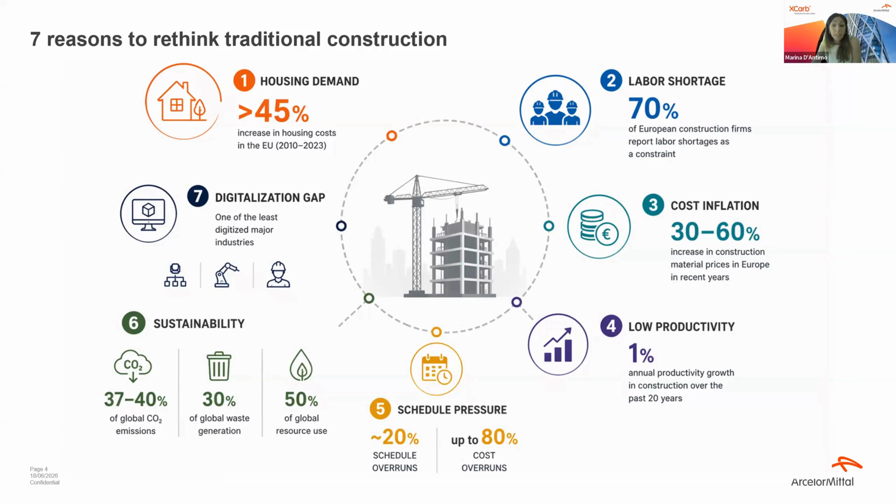And recently we have added on top of all of this that construction is also responsible for the highest share of CO2 emissions, resource use, and waste generation. The European Commission is pushing with regulation to make construction more sustainable, and in the coming years this will become quite a burden. So this is not only one problem, this is a set of problems putting the whole system under pressure. This is why we need to rethink the way we build, to solve, or at least try to solve, some of these problems.

So what might change when we go offsite? When we move our construction offsite, we shift from construction as a kind of fragmented sequence of problems to a construction which is more controlled, repeatable, and industrialized. That changes everything, because we can respond to the housing crisis, accelerating housing supply and affordable housing. We can reduce the cost, reduce the delay, shorten our time on site. We can also address the labor shortage, optimize safety, and stabilize the workforce.

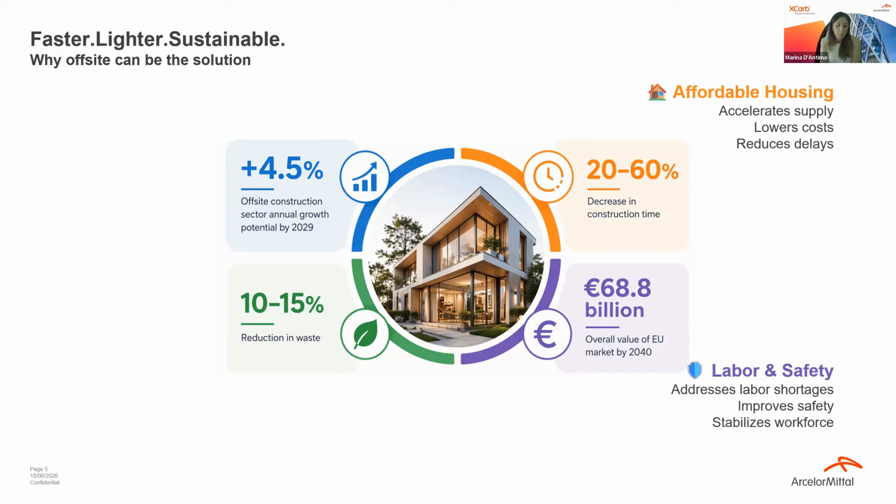But this is not enough. One of the major changes is that we also take into consideration the optimization of material use, reducing waste, and supporting the concept of circularity that you might have heard coming back quite often. But I think there is also another important pillar, maybe the most important one, because it gives the foundation for the digitalization process. Digitalization is already embedded in the solution and standardized. The quality is controlled, traced, and it can be upscaled.

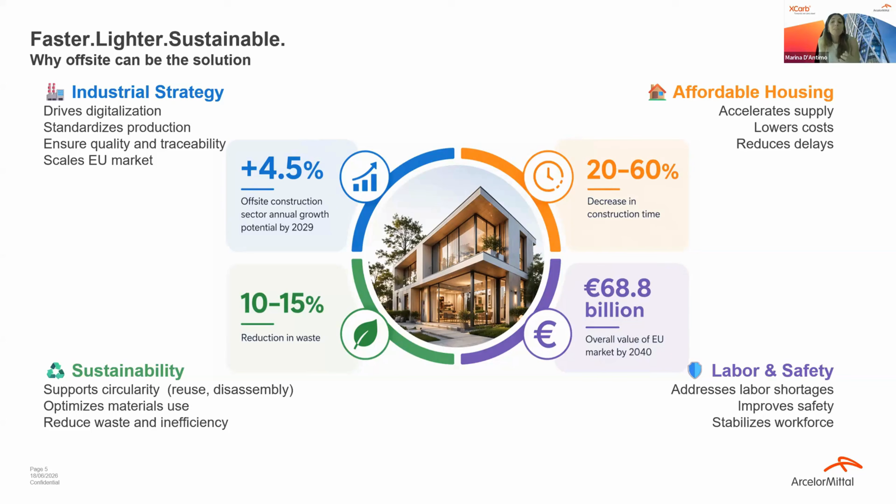If we want a better sector outcome, we need a better construction model. And this is, for me, why offsite is not just faster and lighter, and we will see in the next presentation all the good examples, it is a smarter way to rethink the way we build.

Offsite alone might not be enough, because once we have an industrialized method, the next question is: what is the right material for industrialized construction? This is where material choice can really play a role. Different materials will have different roles in the construction industry, but when our ambition is scalability, precision, consistency, and industrial repeatability, and we add the possibility to disassemble, recycle, or adapt our solution at the end, steel still brings some very powerful advantages compared to other materials, like timber. This is why, for me, steel is at the heart of this revolution.

Everything, we could say, starts with a simple steel coil, because then we need to process it to make light steel, to cold roll the sections, use the cold-rolled sections, and then we have offsite module assembly. We will go into detail on that. And then we have on-site assembly. So we need a material that works with manufacturing logic, not against this process of simplification and standardization. And for this, I think steel responds exactly to the needs of offsite construction.

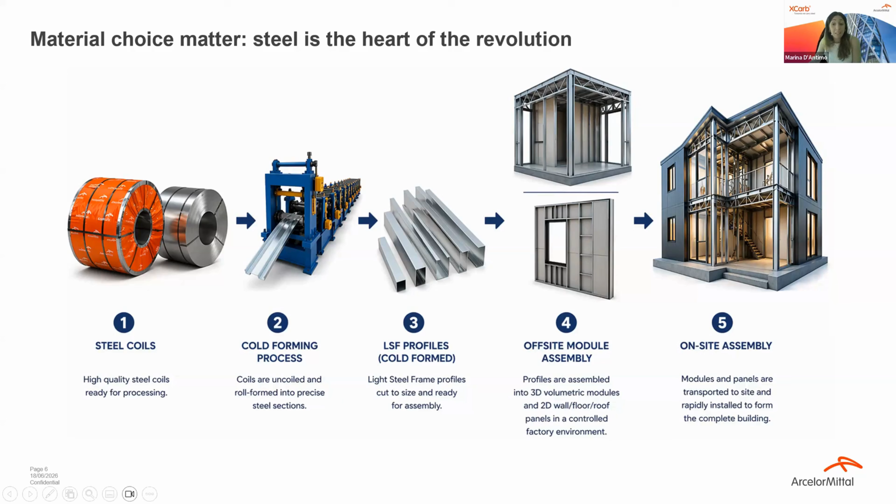Once we have chosen the material, the next question is which grade? Because innovation in construction is also about the intelligent choice of material, and innovation and research are pushing the limits of steel even further. We might be very used to designing with standard steel, for example S350GD, but today we have many more possibilities to make better use of material, keeping the same performance, or pushing for better performance while reducing material use. Using less material is already in the logic of a more sustainable solution.

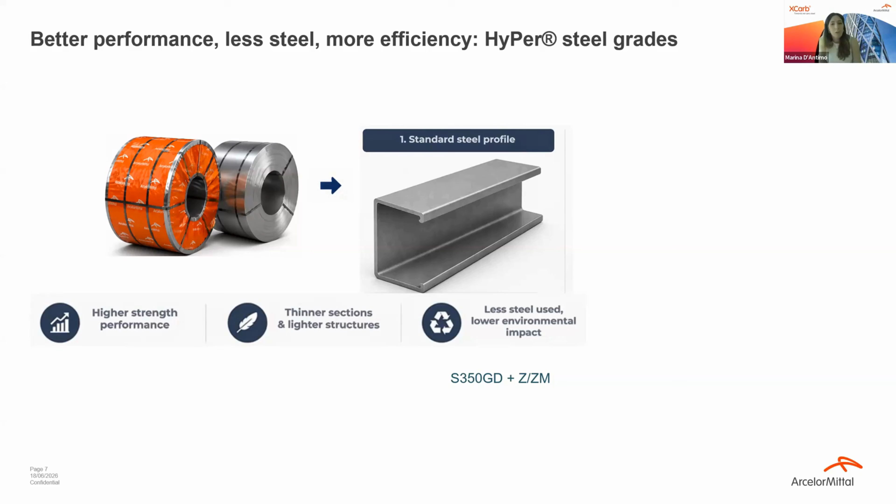For example, we could go higher in steel grade when and where it makes sense, of course. With high-strength steel grades, the idea is quite simple. You have higher strength, you can enable thinner sections when and where needed, using less material, so more efficient, more sustainable. In the logic of an offsite building, where every millimeter, every kilogram of steel, every process has an impact, this matters. It's not only about the metallurgy of steel, but also about the efficiency of the system. Less material, lighter structure, smarter design.

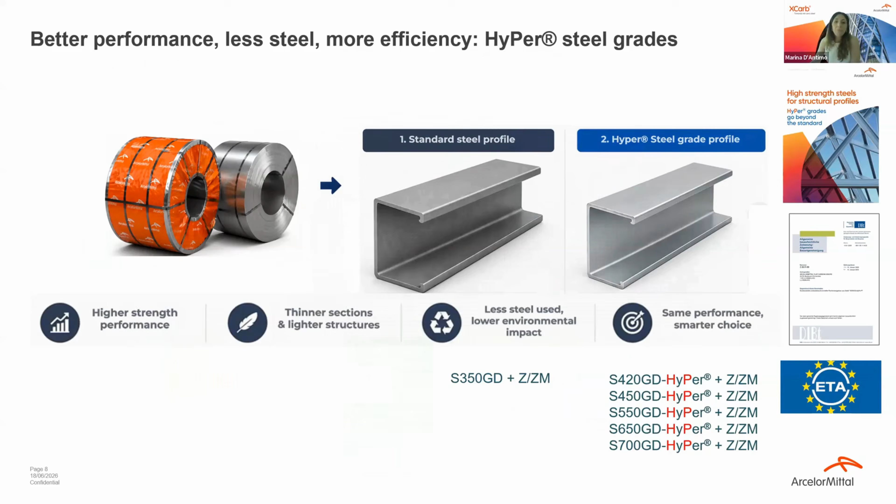But performance, in my opinion, is not only about strength, especially in offsite construction. There is often a point which is, I think, neglected when we choose a material, and that is the durability of a solution, especially when we are asked to extend the lifetime of a structure. If we want offsite structures to be adopted at scale, they must not only be fast to build and light, they also need to be durable.

And the message is quite clear. We need to combine the efficiency of the material with very high performance, for example, coating solutions that can enhance the behavior in the long term. So we will have less maintenance, less need to replace elements of the structure. And that's where efficient coating solutions play a role: they can give better protection, a better and long-lasting solution.

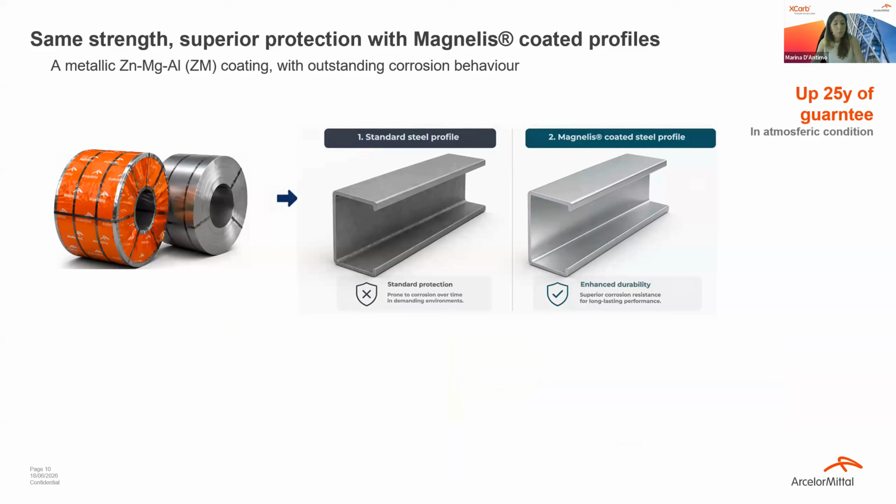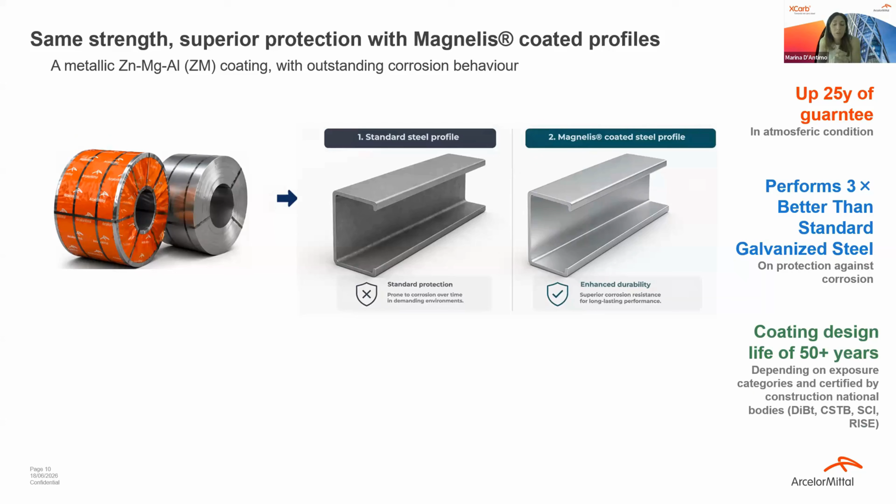And what that practically means is that our project can have a guarantee, so it can be guaranteed up to a certain year compared to the exposure level. It can perform much better than a standard solution, which will imply less maintenance, less need for substitution of elements and so on. And it can also have an extended lifetime, which is the final goal. And of course, this will play a role when the decision is on sustainability.

Now we come to the third pillar, the last one. So when it comes to material choice, we have chosen a material which is light, durable, but this is not enough anymore, because we also want a material that is lower impact. And this is why low carbon steel, low CO2 emission steel solutions, matter so much.

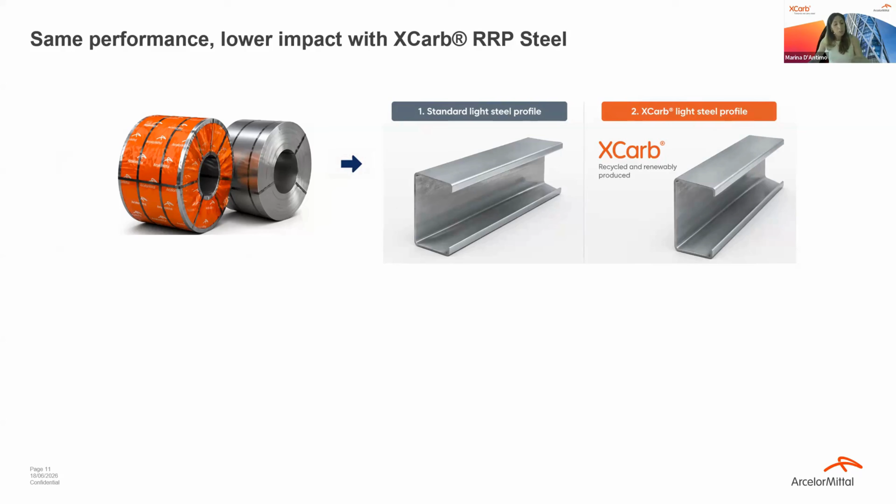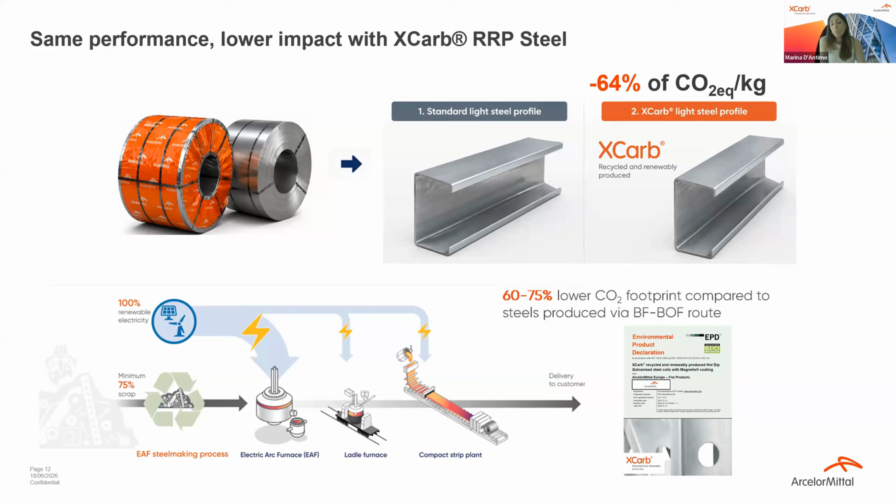For example, and this is something quite new today, it is possible to reduce, by choosing the right material, your carbon emissions by up to 64% of CO2 equivalent, which is strongly part of the game of the future, because the possibility to reduce CO2 emissions matters. It's becoming part of the design process, part of the decision, part of procurement, compliance, but most of all, part of the competitiveness of the solution in a project. In many countries, but soon in all European countries, because this is strongly pushed from a regulation standpoint.

So we have presented the three pillars for the material requirements, but now is where everything comes together. This is an example of how we can exploit, combining together, all the efficiency of this material. If we combine the advantage of using less steel, more durable coatings and low carbon solutions, it's not only about the technicity behind it, it's really a tangible economic value that we can show, because when we combine it all together, we have more space, less weight, and a lower impact.

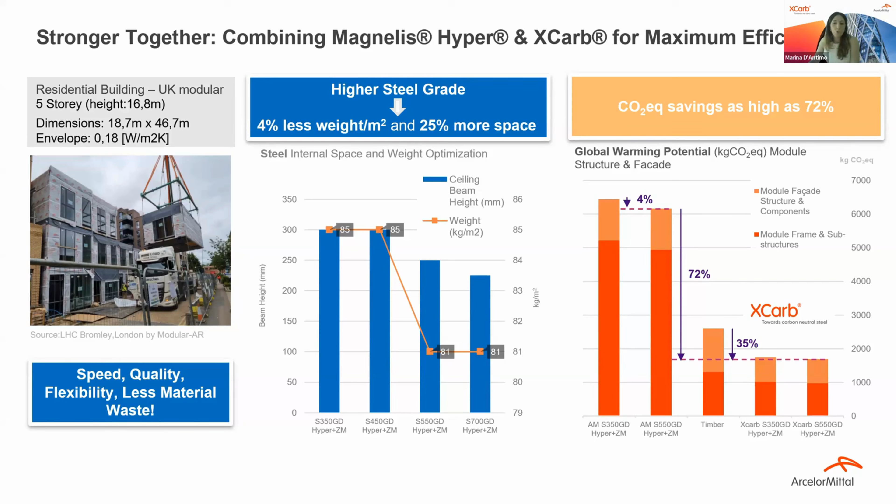And this means that at this point it's not only a material choice anymore, it's a better way to conceive a project. And so we have brought everything together, and the new era of construction needs a good material and a new set of requirements. It's not just about strength, it's not only about durability, it's lightweight, it's low carbon, it's a lot of features that the new material has to have.

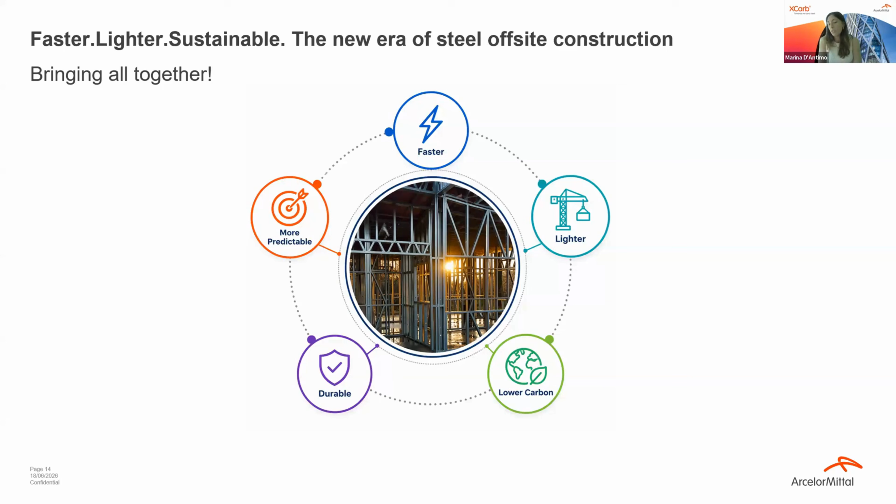And this is why we believe that steel, especially advanced, innovative steel solutions for offsite, has such a strong role to play. Because when steel is designed for the needs of modern construction, it helps deliver exactly what the sector demands. And again, this is not only about choosing the right steel, a better steel. This is actually a better way of conceiving a construction and a project. And we will have many good examples of this in the coming presentation.

So that brings us to the next step in this journey, because once we have understood everything we need, the next question is, how does this translate into a real strategic choice inside the companies that are shaping this future of construction with this innovative solution? And who better than Giulio Pollina from Reimagine by ETEX can show us what was in the mind of Reimagine by ETEX when they decided to go for steel frame, and why this became their preferred choice, with some practical examples and their story. So thank you very much.

We are happy to be here because nowadays all of us are hearing a lot that this is the future. But I don't agree, because those of us here are involved in this, in our case since 2011. So it's been our present since then.

I understand that some people discovering this in the last years could think that it is the future, but companies like Reimagine, with more than 5 million square meters installed, have demonstrated that this is much more than just a new thing on the market.

So today we talk about steel and the steel frame, and the title is Faster, Lighter, Sustainable. And that's what Stalart is about. Stalart was born in Poland 25 years ago. Greg, the founder, was working in the United States for 10 years with wood prefabricated houses, and he discovered that with steel he could improve the scalability of the process, control it much better,

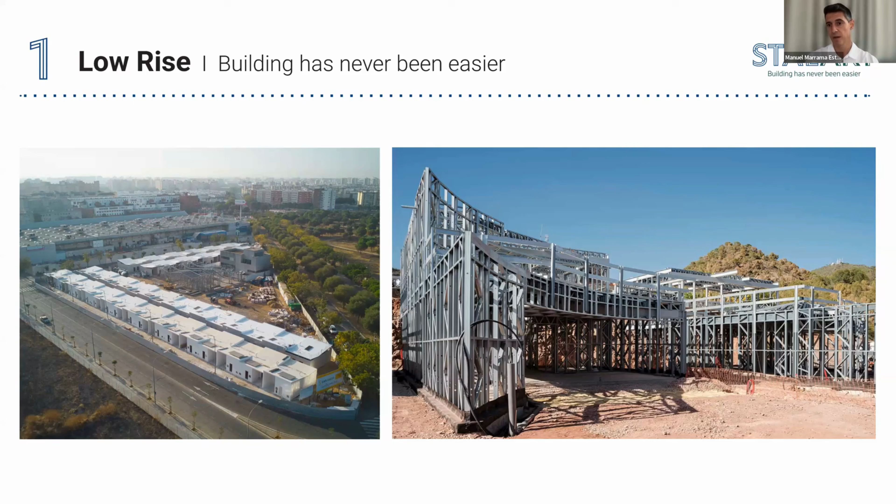With our system the project can be planned much better, controlling the dates and the costs, and that certainty is a big value to the market, because all of us have heard many times, more than we like, that the time was not met, the costs were not met. Luckily, using technology and the industrialized method, especially with steel, you can achieve that. That's why we are in the market, and this is our value proposal.

In the next one we can see a very good example that Reimagine is now installing in Scotland, and I'm using this picture because it explains a lot about our relationship. When we started to grow in Spain, developers asked us why we didn't do buildings and go to this other segment. So we started to do R&D and invested a lot in growing our system to more stories.

At that moment, by chance, we crossed paths with Reimagine and got to know each other. They discovered that we have a very strong position in the market in Spain, and we discovered they had a really good product on the market in Europe.

So we did a good match, and we did a partnership in that sense, because the moment is now, and the product is already there, and we have the resources to install, and we have the resources to be very involved in the market in Spain. So that's why we partnered, and we are now involved in several projects in Spain, and the future is quite brilliant in that segment, because we are having a really good result on the market with that.

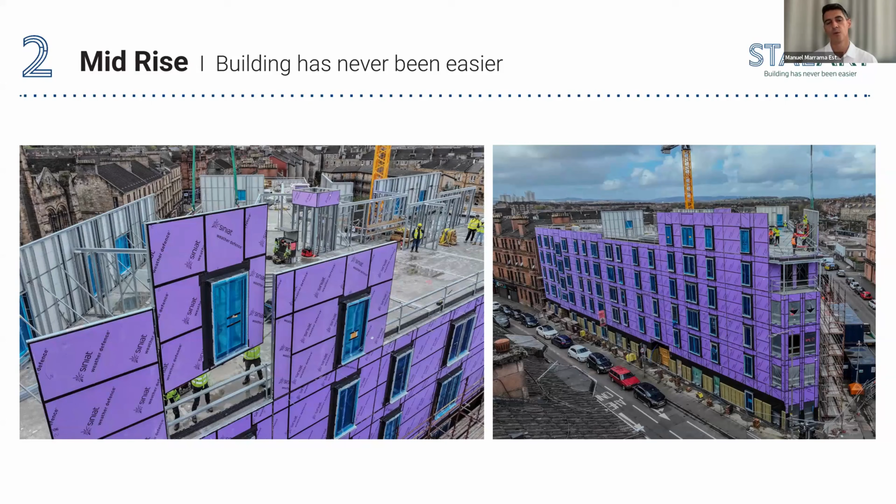And then if we go to the next one, we'll see the third one. Well, this is another example. We can stop on this, because I think it's worthy, to explain a bit more about the system. Here we can see that the system is involved with the bearing walls, also internal bearing walls and external bearing walls, with this cladding material that comes outside and brings the opportunity to really scale up the project, and to do a lot of different processes at once we install the structure. Also, in this project they are coming with the windows.

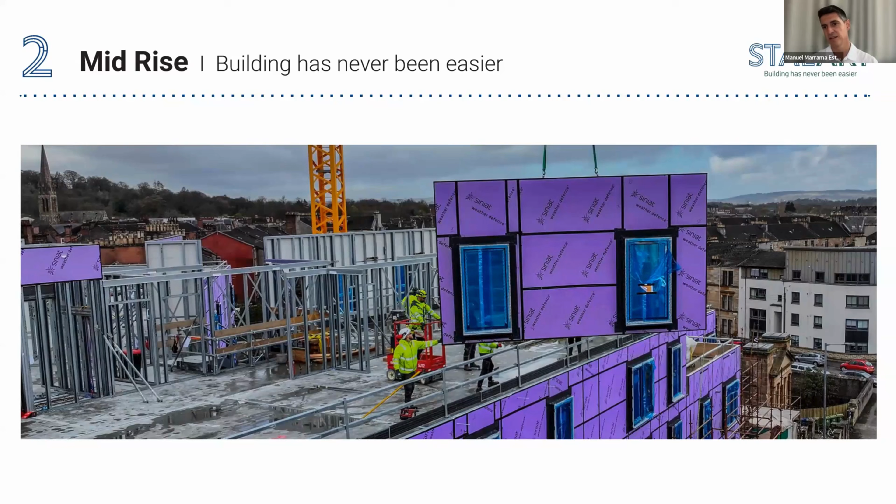But then there is another thing very important, which is security. You can see how clean the building site is, but also you can see that all the security is already installed, because it's part of the system. So again, it gives us another step forward. It's not only the product, it's also the security. And again, it's planning. Again, a lot of indirect costs are being reduced in the building. So in terms of cost, when you learn to quote properly with those systems, you understand that the value is not only the list of the materials, the value is what you get with the system at the end of the process, and that's the real value.

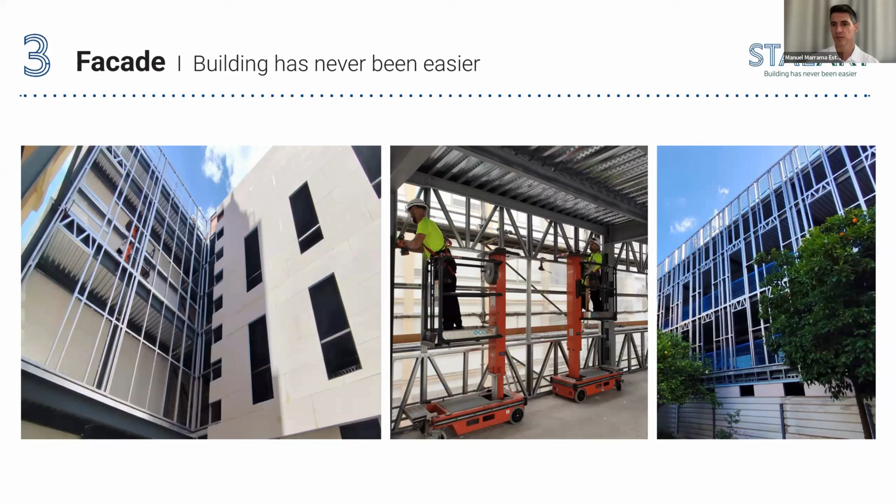And then if we go to the next one, we can see our third business line. It's the facades. When we are not acting as the main structure, we act as the secondary structure. We can install the envelope of the building very fast, using what we call infill structures, because we can go straight away in front of the main structure, or we can fit in the traditional structure, and we can combine with concrete, or we can combine with hot rolled steel to fill one building. Sometimes a building was started in the past and for some reason the process stopped, and then they need to speed up the process. So this is our third line.

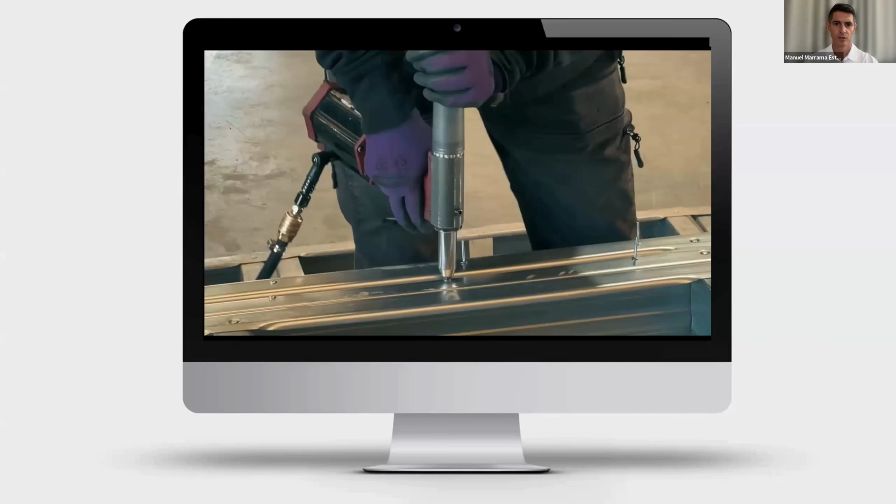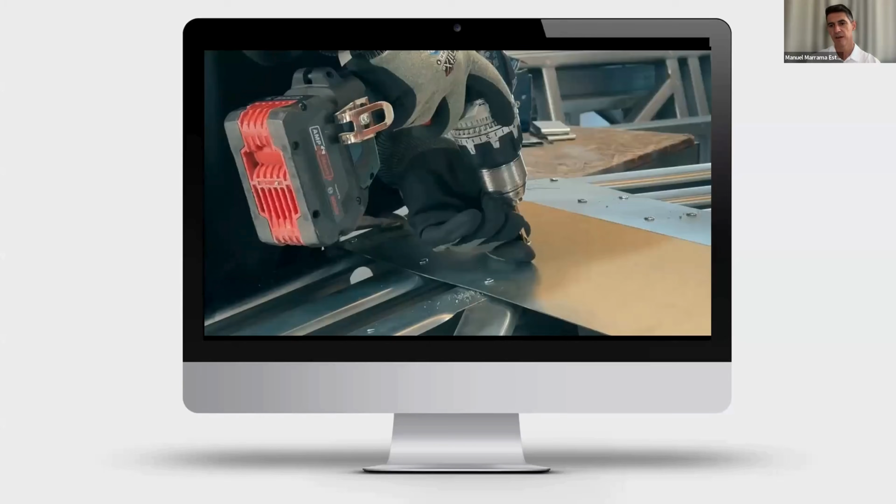Now, if we go to the next one, we can see a video where you can understand much better what we do and how we do it. We are not hearing the music, but I can explain that we made this video to let you listen to the sound of the factory. We are in the factory. We have machines producing very, very accurately what the architects design. That's why Julio is always very happy, because we are building what he is drawing. So this is very, very interesting.

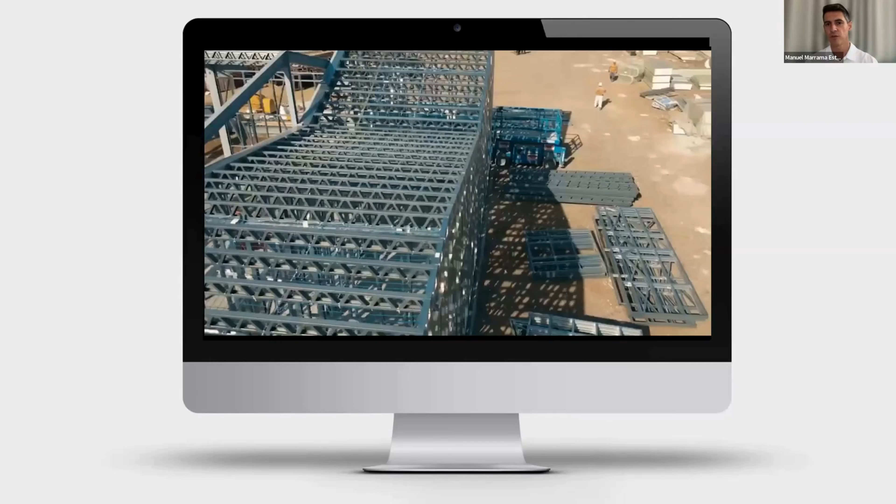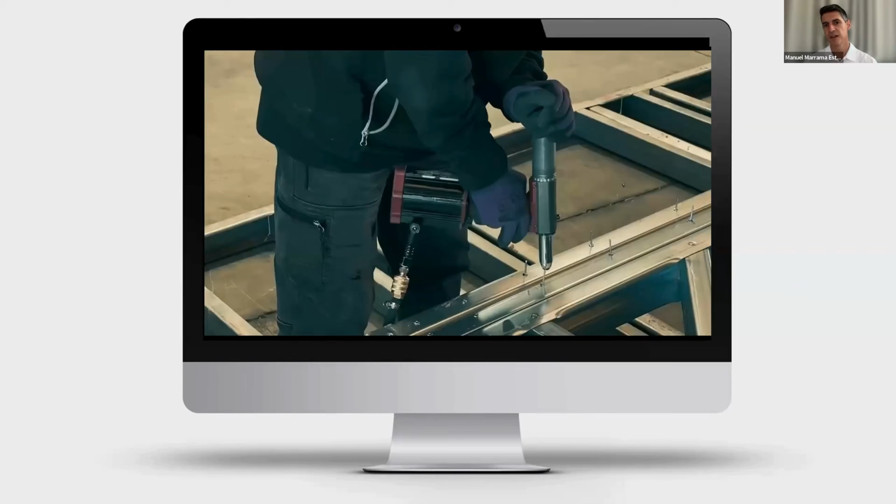So one of the main things is to design everything in advance, tailor it, and take into account installations. Everything that we can advance is something that we are going to avoid then on the building site. So the more things we produce, as we call it, on the desk, the better, because we avoid that happening on the building site. It's always easier to sort it out in the factory. Yeah, the video is showing how fast things happen, basically. Now, if we go ahead to the next one,

we talk about material. Of course, material for us is key. We are doing everything with steel, and we are doing 100% with ArcelorMittal material, because we need to make the better choice. And we do everything with Magnelis, and we use minimum 350 GD material, always, of course. In the low rise, always 350. We are using 1 millimeter, 1.2 millimeters, and for the mid rise, 450 is the starting grade that we are using.

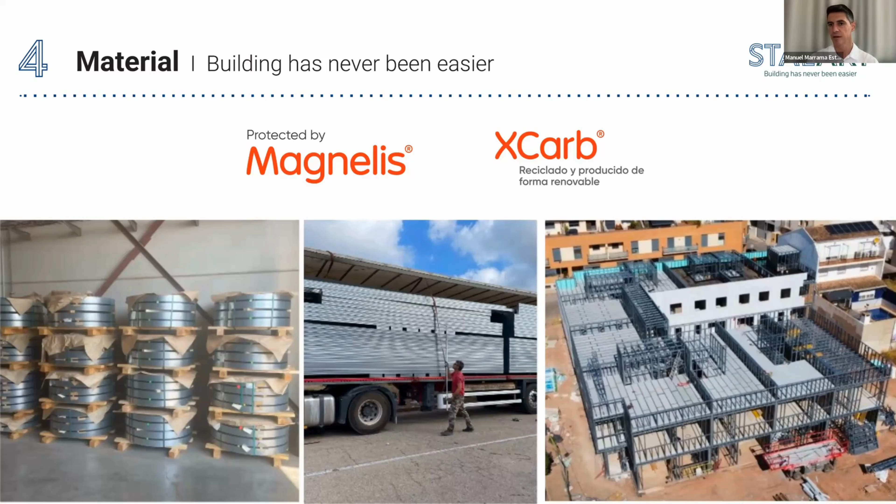And sustainability every time is bigger, and is becoming more important in the market. And I have no doubt that in the future, XCarb is gonna be very important in our portfolio of material.

Yes. And now if we go to the next slide, it is the most important for me in the webinar of today because of one reason. When I was invited, I wanted to transmit one idea and just one idea, and this is the idea. We don't like to talk about expensive or cheap projects. We talk about viable projects. And to achieve viable projects, design for manufacturing and assembling plus lean construction is the key, is the formula to succeed in the market. If you want to decide only with the list of cost of materials, it's because you probably don't understand the system.

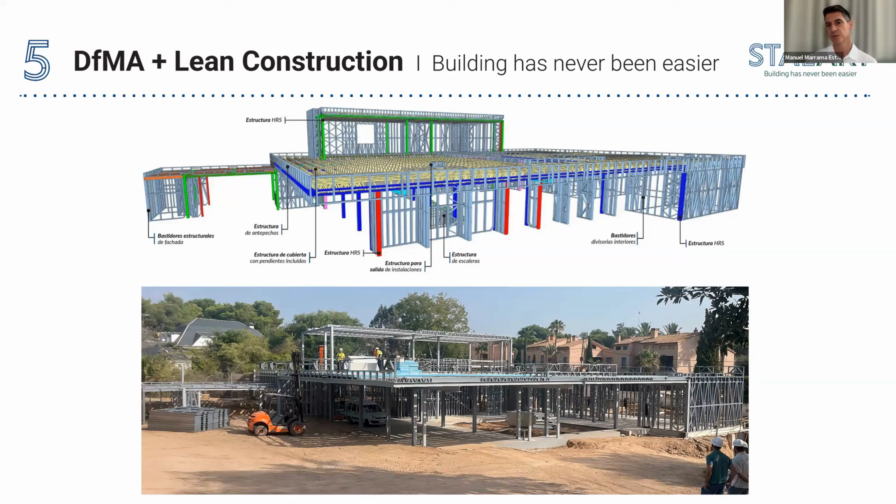And the final product is a very high-end house with a lot of detail and a lot of process. In the background, there is a lot of engineering, there is a lot of design, there is a lot of value added once the steel comes to our factory, in between that moment and the moment we install on the building site.

And now if you go ahead, the next important message that I want to send is that we talk about return on investment. That's what we talk about. And that's why it makes sense to work with industrialized systems, because of the certainty and because of the return on investment. That's when the project is viable. So it's not if one project costs a bit more or less than another system. The important decision is, when the end of the project comes, the value that you get, and that's the return on the investment for the investors. We can see two examples now, the two videos that come next.

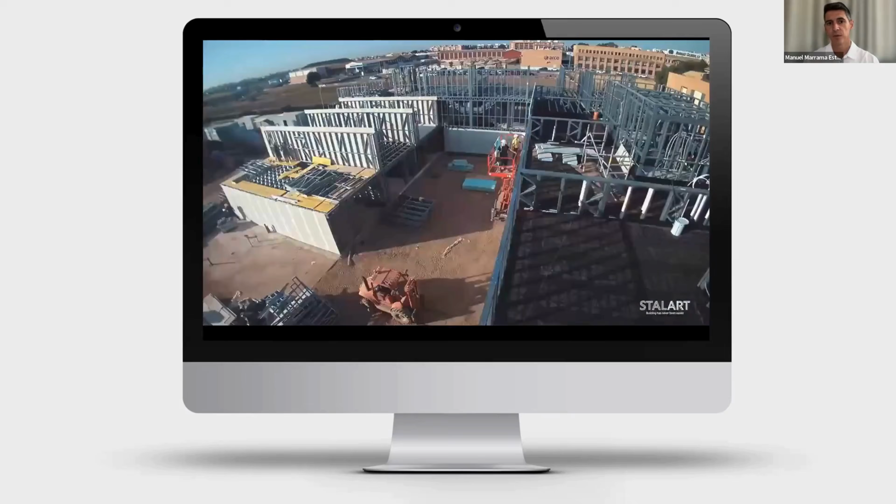This one is the one we did with Julio in Valencia. And in this video, the most important thing, because probably you just see a time-lapse video, okay? But what you are seeing is 7 weeks. In 7 weeks, the project was like you can see in the images. So everything was installed, everything was very fast. That project was finished in 7 months, 100%, 7 months. So that's the opportunity for a developer to do, instead of one of those, 2 per year. That's return on investment.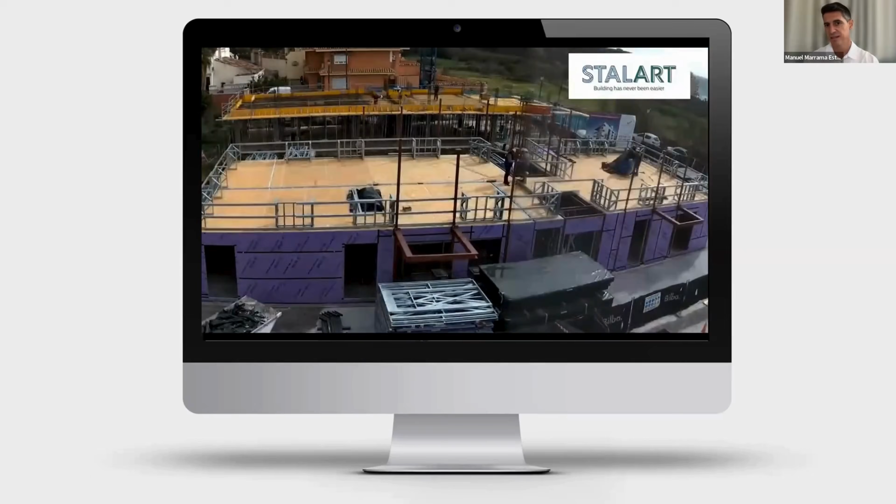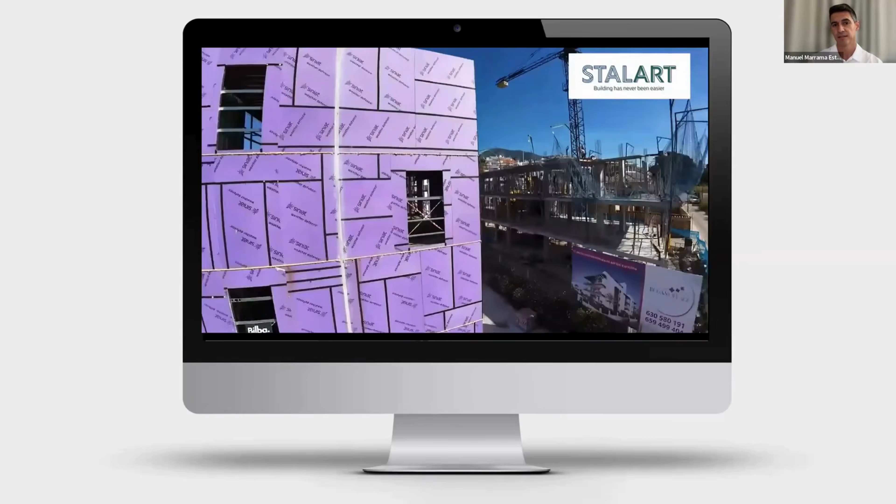And then we can see the next one. This is the first story building that we installed with the Reimagine system in Spain, in Fuengirola. This was installed for Jordi's company in the south of Spain, and we installed this in 5 weeks. This was also for social housing and a public project, and it was the first demonstration on the market that this is possible, this is real, this is possible to coordinate. And I guess that he will speak about this project now in his speech.

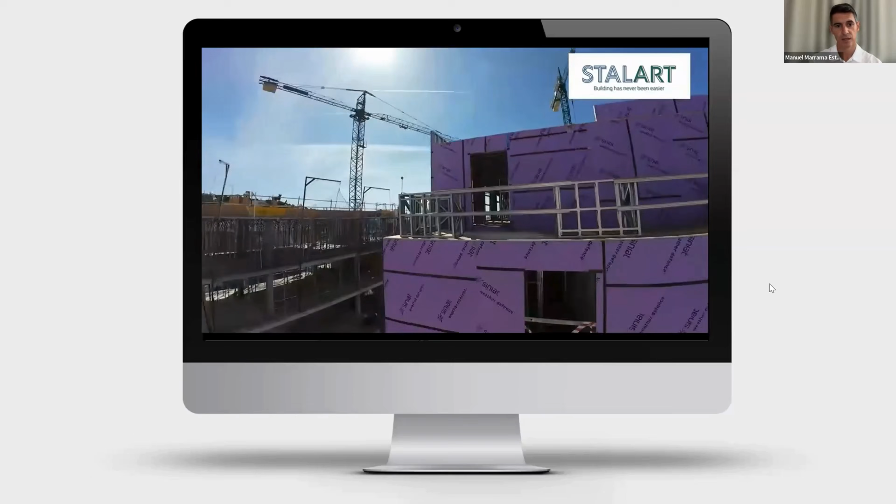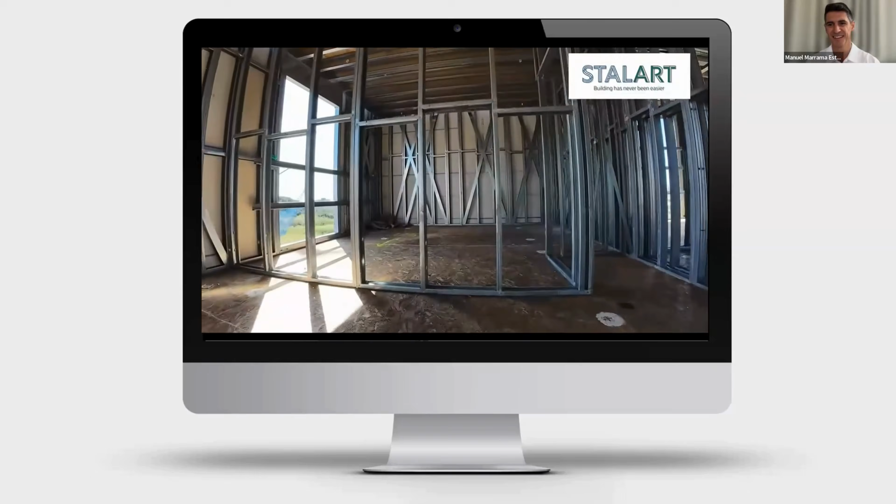But I think that I can assure you that we weren't cleaning the building site for the video. This is how it looks every day. So that was a good experience in the south of Spain. It was the first with us and Reimagine in Spain.

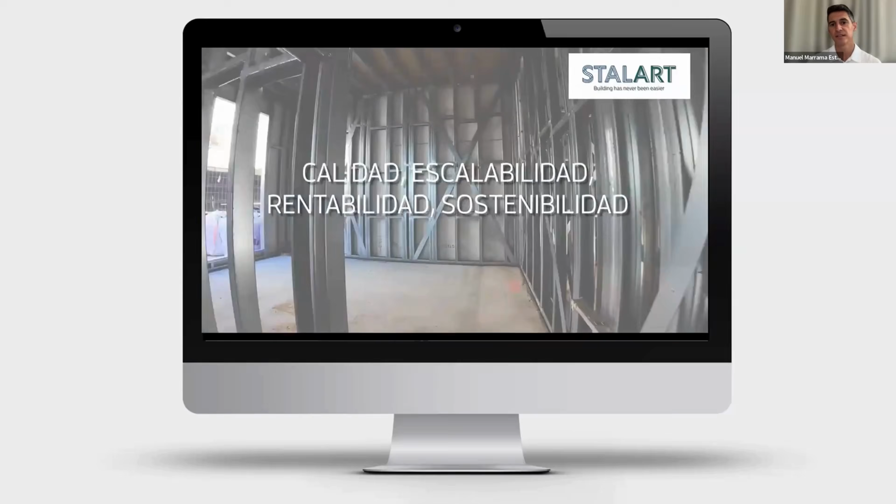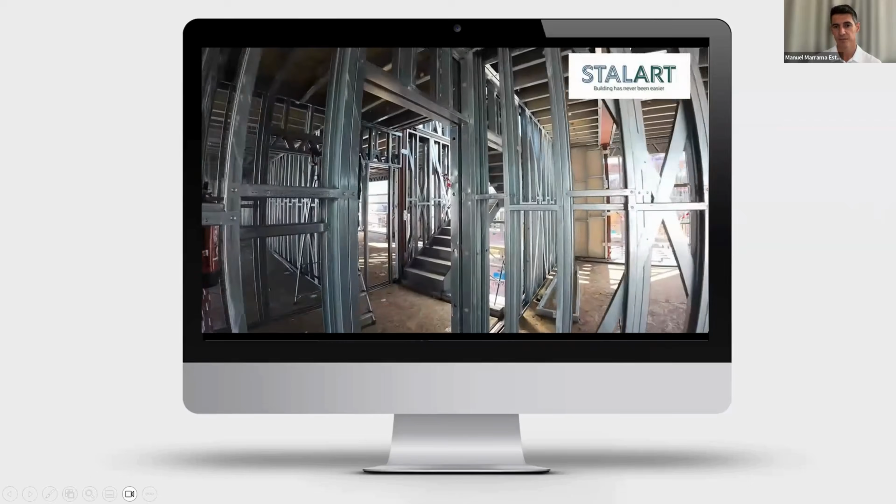And now we are starting the new installation of another building in Castellón. Next comes the Julio project in Valencia. And again, with Jordi, I guess that we are going to do another big one in the south of Spain by the end of the year. So that's what we do with the steel, and that's why we are so happy using the material so far.

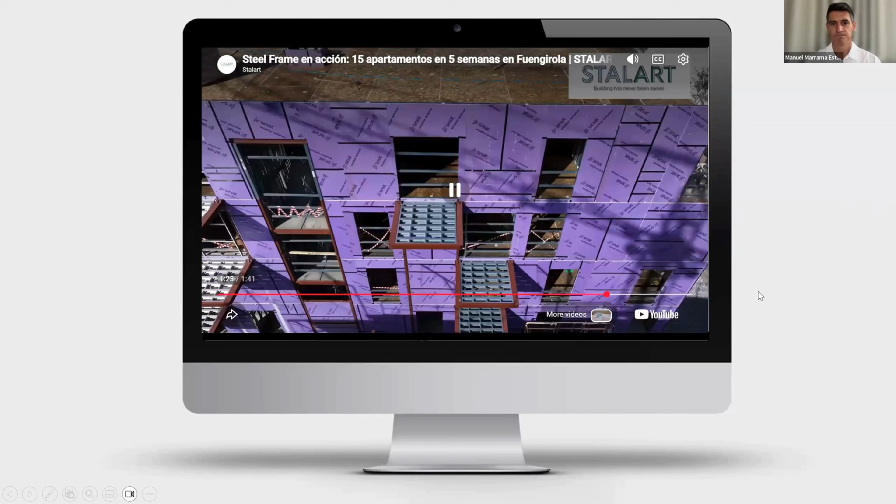Okay, so thank you, Manu, for the presentation. I guess, Jordi, you're gonna share your screen? You wanna take it over? So we continue our journey with Bilba. Jordi, you're muted. Yeah. Sorry, I was talking alone.

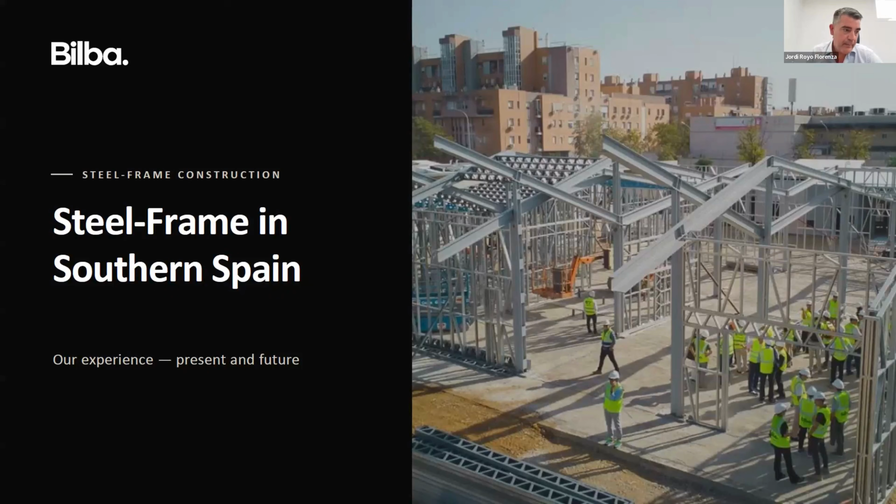I'll keep it straightforward. First, who we are and how we approach transformation in construction. Second, the current context and the key structural challenge. Third, our real experience with the steel frame projects, including timelines and performance. And finally, what comes next? What will we do in the future, as Manuel has told.

Who are we? We are a construction company with more than 20 years of experience operating across residential, commercial, infrastructure, and energy sectors. At the moment, we have more than 1,600 homes under construction across 58 active projects. And our team is about 450 people. But beyond the numbers, what really matters is our strategic focus. We are strongly committed to industrialization and collaborative delivery models. This is where we believe the future of our sector lies.

For us, industrialization is not just changing materials or construction systems. It's about changing how projects are conceived and delivered. We use industrialization processes supported by BIM, but the real transformation comes from collaboration, particularly in IPD models, where developer, designers, and contractor are aligned from day one. This is critical. Industrialization only works to its full potential when projects are designed with the construction system in mind.

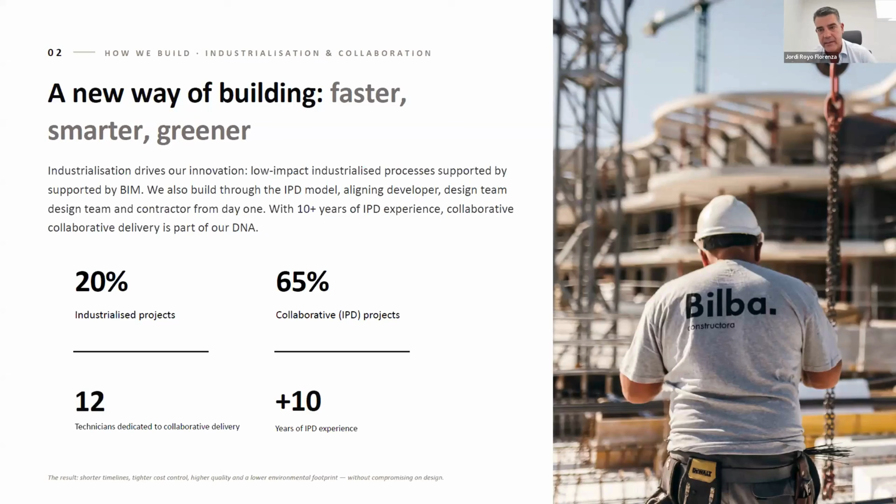As we can see in our portfolio, we have nowadays 65% collaborative projects, and of the total projects, 20% is industrialized. We have a huge team specifically dedicated to collaborative projects, about 12 technicians, and we have experience of above 10 years in collaborative projects.

What is the problem, or better, where are we now? One of the main structural challenges we have in our sector is the shortage of skilled labor. We have around 300 direct workers, and the average age is about 42 years. But the key issue appears in the more physically demanding trades, such as concrete structures.

From the age of 55, long-term sick leave due to chronic fatigue becomes increasingly frequent. We have estimated that in 10 years we maybe will have only 10 people able to build structures. Concrete structures.

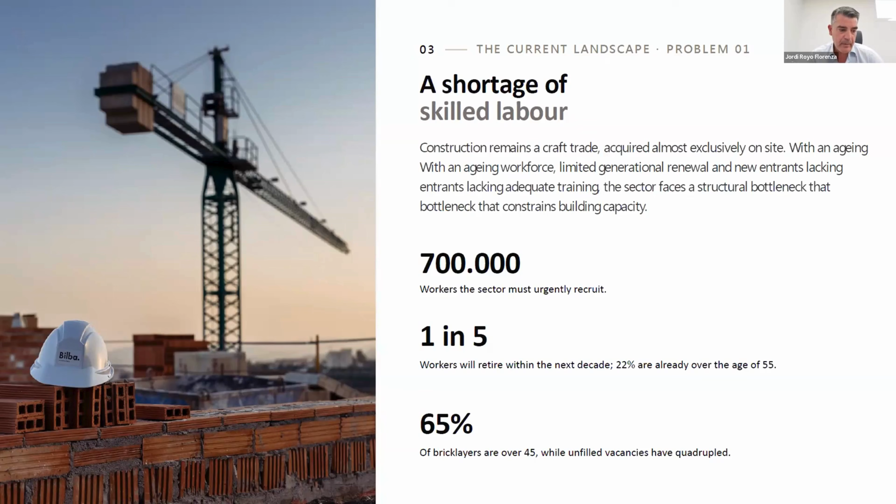On the other side, we have another problem: we are not delivering the number of houses that the market needs. We have an estimation that in Andalusia about 25,000 houses are needed per year, and we are only constructing about 10,000. So there's an amount that is increasing year after year.

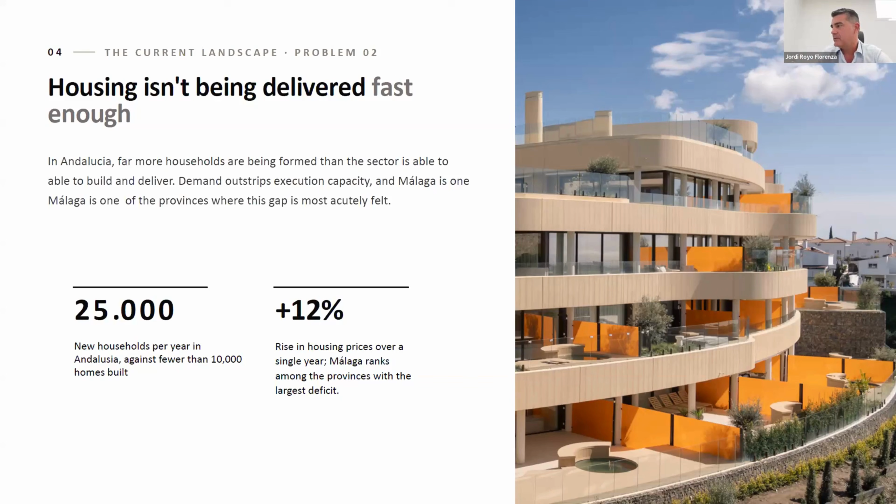And if we don't change how we build, it will not be about efficiency. We have to be able to build at all. We have to try to reach that 25,000 houses. I'm going to make a short focus on the projects, on the experience from the projects we have already delivered, and why we have come to work on industrialized projects.

First of all is Los Pacos. It's the last video that Manuel has shown you. It's about 15 social housing units in steel frame. It was our first experience in steel frame. We hadn't worked before in this industrialized system, and it was a very useful experience. We have learned a lot about this kind of construction and this kind of building in concrete.

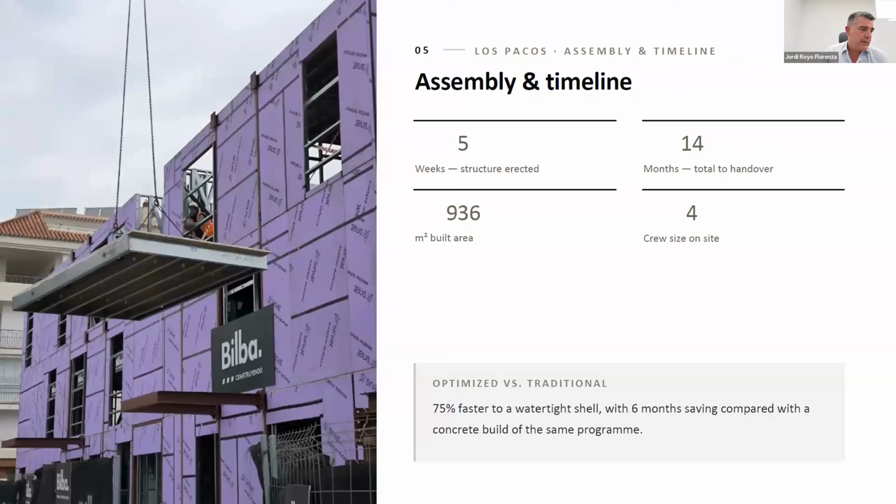This project we have completed. Well, Manuel has told 6 weeks; we have appointed about 5 weeks to erect the structure. It's a very fast process. Otherwise we would take about 5-6 months to complete that structure. We are talking about a 75% reduction of that time. And when we finish the structure, as you see, it's a watertight shell. Water is not entering the building, so you can begin with the installations and the masonry.

Some things we could have improved in this project. As I told you before, it's important to begin with the project in mind and the system in mind. Maybe these solar balconies you have seen here had a cost benefit that was not efficient. We think it could be better with another way of thinking the project. There were some double layers of steel frame inside the building that could be more efficient.

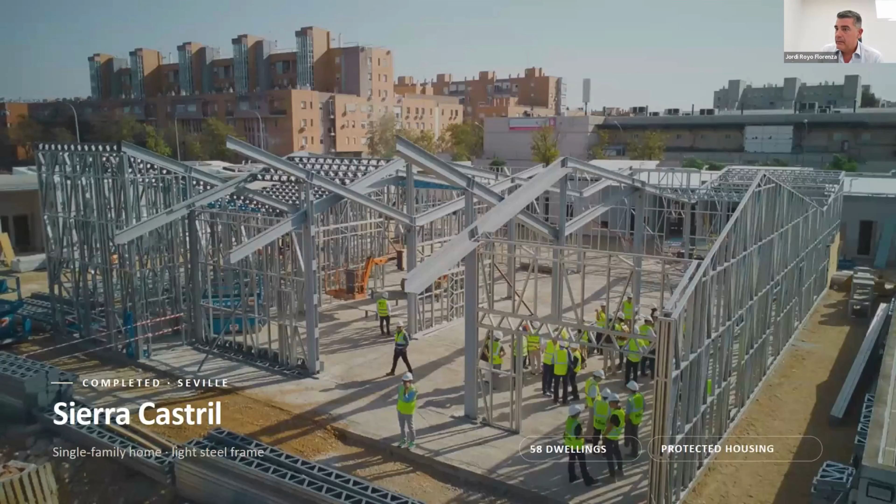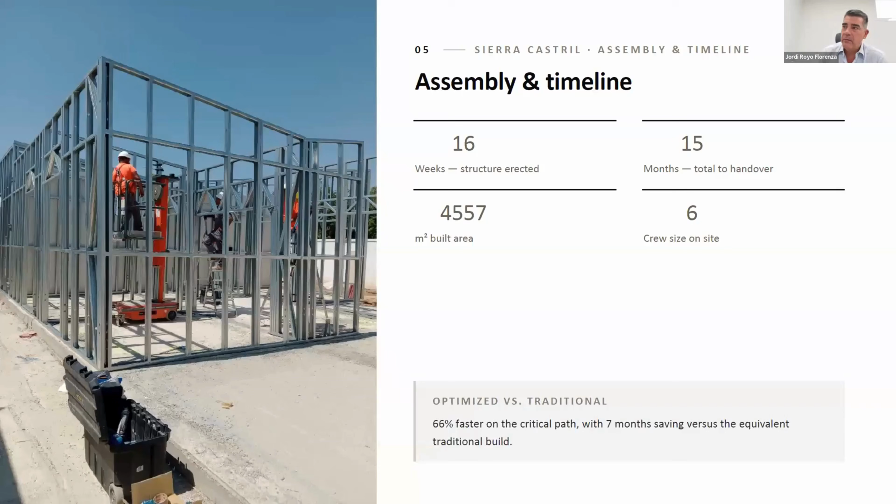This is the Sierra Castril project. Manuel has told you about that. It was a different project because it has 58 units of only one floor, social living too, and we took about 16 weeks. It's important, I haven't mentioned it before, to see the crew size on site of these projects. I go back. We have told that we have done this building, we completed the structure in 5 weeks, but only with 4 people.

In the other case, I told you we would take about 6 months and maybe 10, 12 people, and here we have only 5 weeks and 4 people. And the same case here in Sevilla. We have been working over 16 weeks more or less, with 2 teams of 3 people, and they raise 1 house per day more or less.

What are the savings here? We have savings first in time. In terms of time, we have a reduction of about 33% in total works. As Manuel has told, in some kinds of projects where the operator needs to begin operating as soon as possible, it's a big improvement.

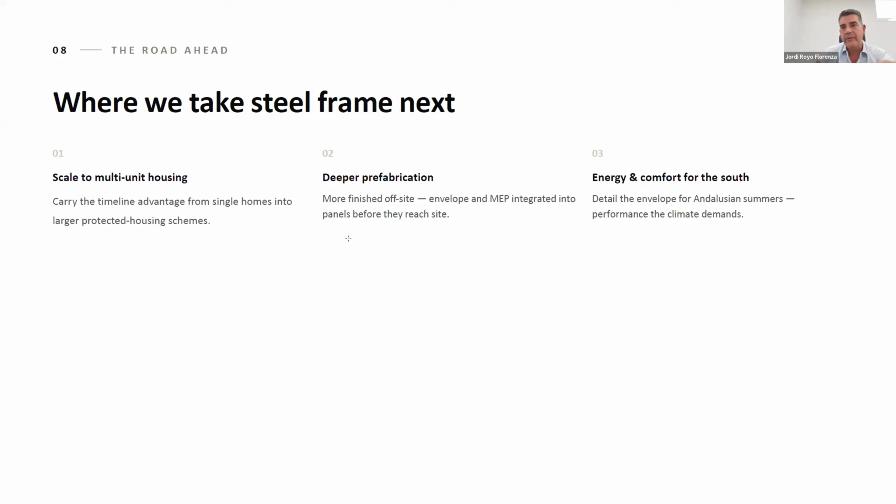Second, increasing the level of prefabrication. We need more finish offsite. The photographs that Manuel has shown with the windows, it's very important in order to work inside the building when they finish, because we have all the building closed. And the specificity for the energy and comfort here in the south of Andalusia, because here it is very hot, and it's very easy to implement the solutions of steel frame with other systems of insulation that are more usual here.

And that's all from my side. For us, steel frame is not the only solution, but it is a very powerful tool to address the challenges we currently face. Thank you very much. I'll be happy to take any questions at the end.

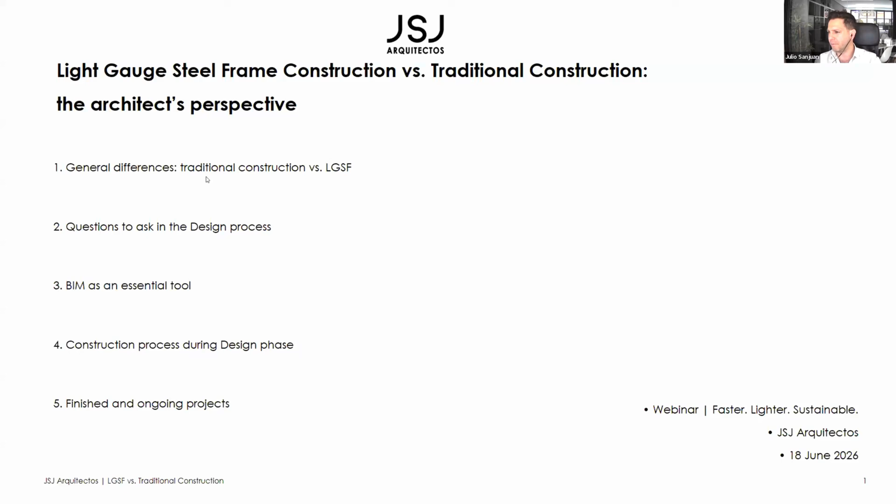Thank you. So I'll go through these 5 points. Many of the features of light steel frame have already been talked about. First, explain how we got here. I met Manuel almost 10 years ago. We were very interested as architects to find new ways of building and more precise ways of building. And we started doing single family houses thanks to Stalart and Manuel, who gave us all the support, the engineering support, for the technical doubts that might come to an architect.

In Spain, it's important to say that architects are also responsible for the structure. We sign, and if there's any problem, it's not the engineer; it's mainly the architect that has the responsibility. So that support they gave us was very good. Then after several years of doing several projects hand in hand with Stalart and Manuel, we were so convinced about the system that we decided to be part of not only the architecture design team, but also the investor team. So that's a combined point of view here. For us, it was also economically attractive to use this technology.

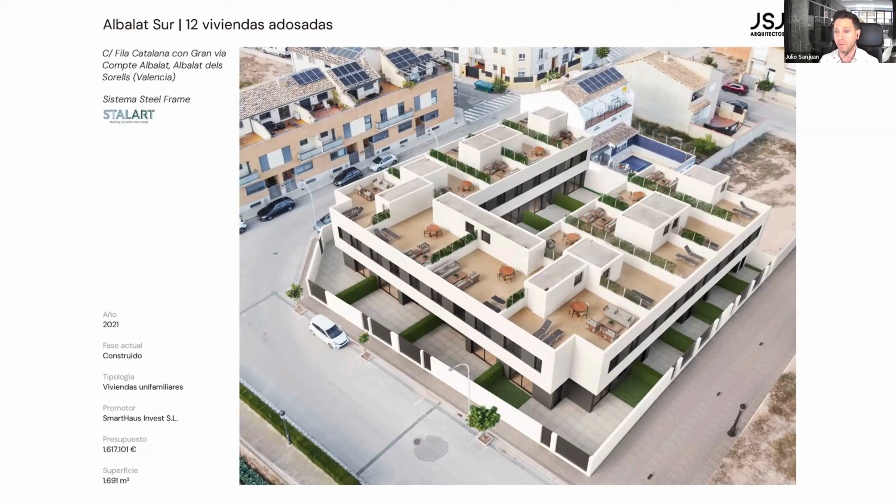So this is the project that Manuel explained. It was finished in 7 months, 12 single-family houses. And today we are with Reimagine, which is Manuel elevated to the cube, and their partnership has opened us the possibility to go to mid-rise. We have a small development company with 2 other associates, and this is the 3rd project that we're developing.

This is a student residence, as Jordi and Manuel talked about. Not only do we know the advantages of the system, but in this case it was crucial, because for a student residence the school schedule starts in September, and we have to finish it before September next year. So it was mandatory, not only from the architect's point of view but from the developer's point of view, to be able to start operations by that date. So that's just a small introduction to know how we got here.

I mean, what are the differences? You mostly already talked about them. Traditional has higher unpredictability versus lower unpredictability in an industrialized process like steel frame. In traditional construction, you still continue with problem solving of things that should be already solved. And the advantage of light steel frame is that that's directly not possible, because everything has been already produced. So if you have a problem on site with light steel frame, you do have a big problem.

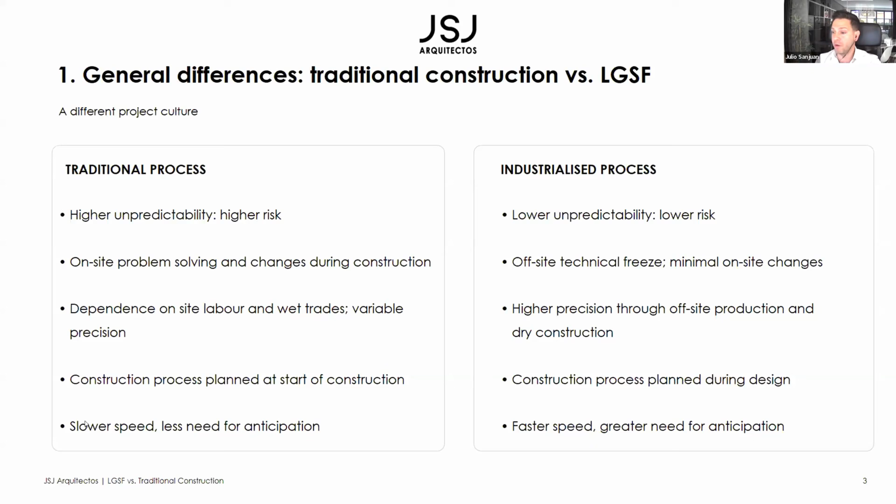They need to be in the mix from the very beginning, because they will give you insights on how to access, how to stockpile, the elevation machinery. All those details are crucial, and if you can combine them in the design process, it's even better. So when you're slow, you don't need to anticipate as much. When you're fast, you do need to anticipate a lot.

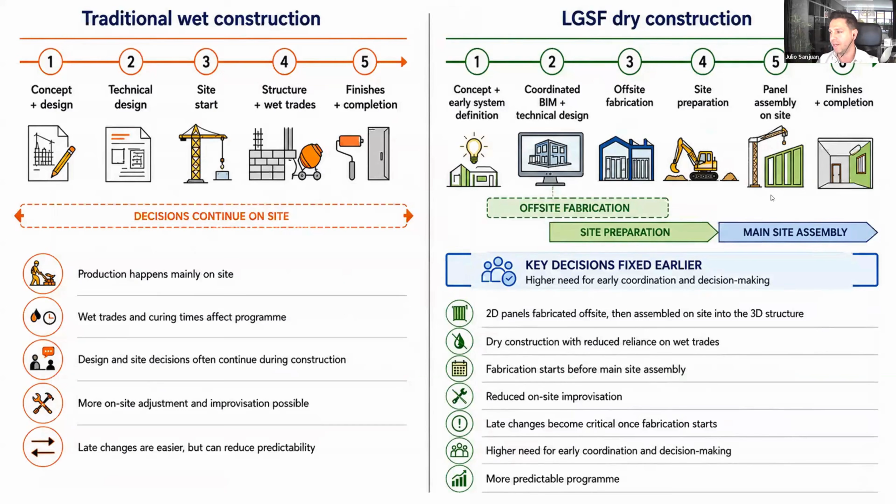This is a bit what I was explaining, no? All the decisions keep going on. That means changes can come. On a light steel frame offsite system, those issues are not possible, because then you have to go back to the factory. So that's why this anticipation is crucial in very early stages of the design. I don't know if there are any architects or engineers in the audience who have ever tried light steel frame.

Questions that you need to ask yourself when you're starting a project, no? Steel frame, from a structural engineering point of view, works as load-bearing walls. It's not like a column or beam system. So you need to define which walls are load-bearing. Are these floors or these walls vertically aligned? And what are the spans and the opening dimensions?

Some of these could also be questions you could ask on traditional, but I'll go back to the vertically aligned walls, because as with every system, the steel frame can adapt to any design, which is one of the advantages versus 3D or other industrialized approaches. But to make it more efficient, you want these walls to be aligned, or this structural logic to be as optimized as possible.

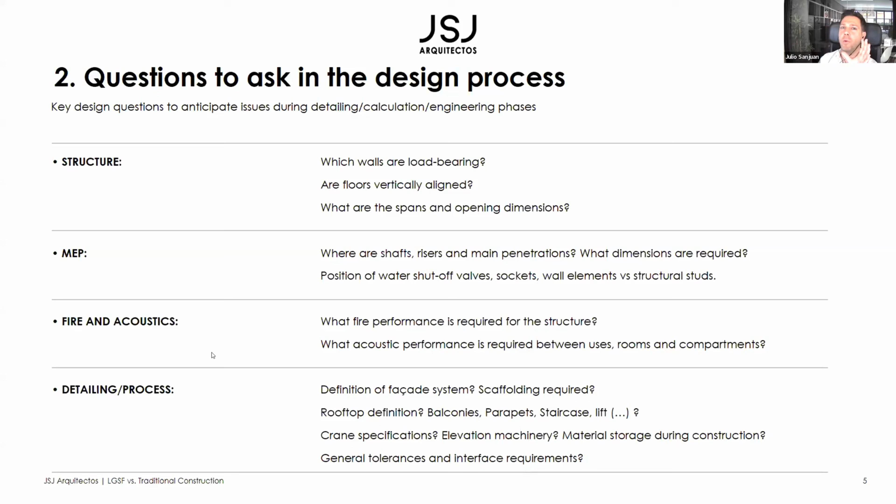Okay. Also, you need to know where the MEP, where all your shafts are. You need to know the fire protection and acoustic performances you need for your project, for the different uses, and of course the detailing and how the facade is going to be. You need to ask all these questions during the design process to know what you're getting into, and the earlier you do so, the better. Well, these are some examples.

You need to know where these shafts are going to be, those penetrations into the rooms, what the fire protection is. Fire protection is a very critical thing in this system, as it works together with plasterboard. It's a three-dimensional steel structure, but it uses plasterboards as part of the system for fire protection. So it's critical.

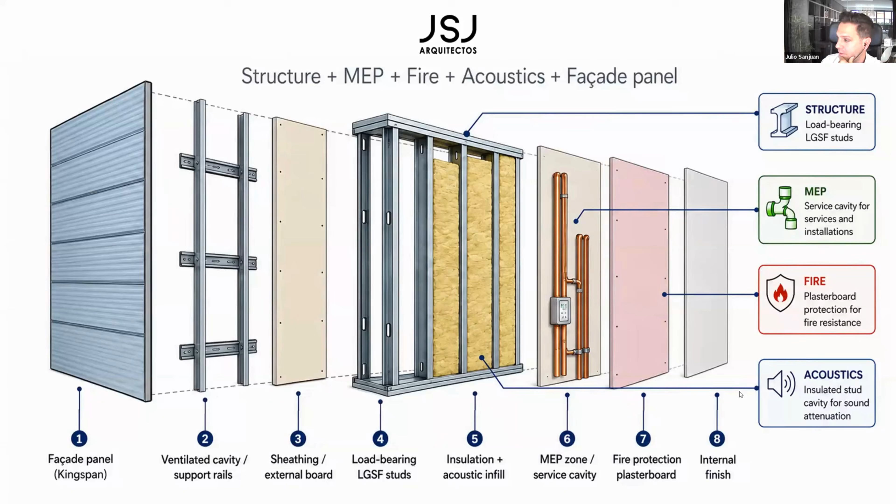Well, this is just a detail, I don't know if there are any architects. One of the differences in the Reimagine system that we really like, and that really opens possibilities for us, is that the load-bearing walls are continuous vertically, and the slabs are independent in each part of the floor. That's one of the features that makes mid-rise on steel frame possible, which was something that we didn't know until Reimagine came along.

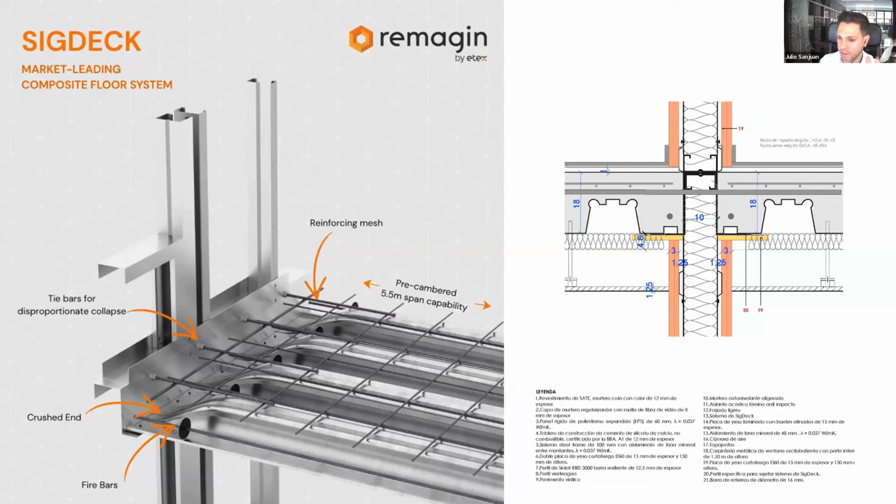Using building information modeling, I mean, this is the norm for every practice, I'd say. But if you're going industrialized or light steel frame, that's even more so, because you need to know where every element is placed, and it's amazing to work with other professionals that work with 3D and BIM tools, because it's a way to work together on the model, a way of having the built model before you start producing the structure.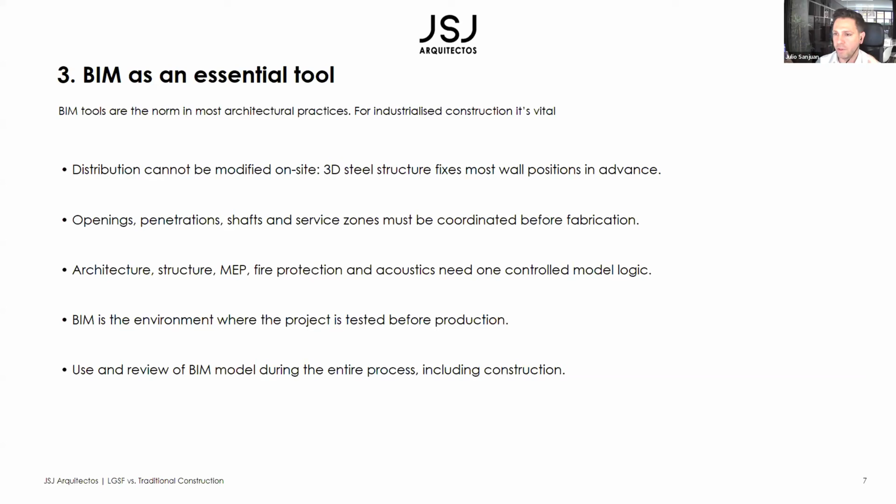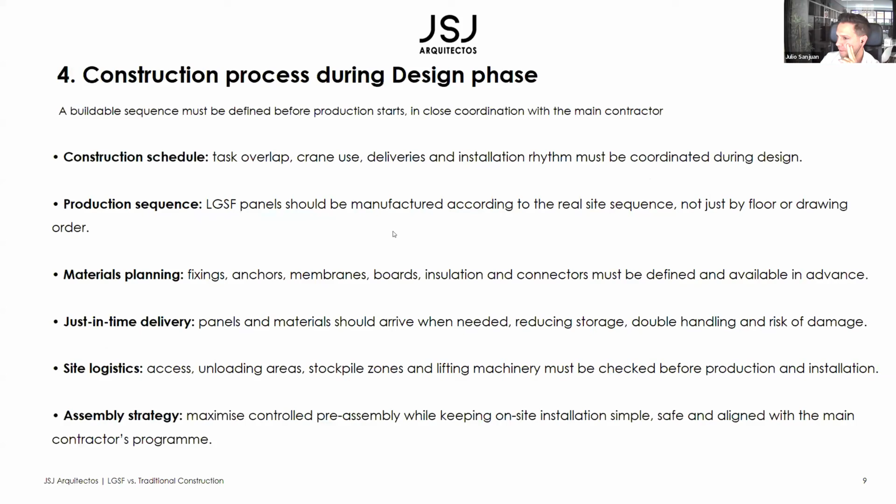I'm going to skip to this little sketch. One of the things that makes the system so fast is the overlapping of different tasks. As you can see, as soon as you finish one floor, you can start working with the MEP on the floor below. The reason you're able to do this is because there's no formwork, there's no need. Once you finish the slab, you can right away start working on top of it. So that's a huge advantage, and that's one of the things that makes the system so fast.

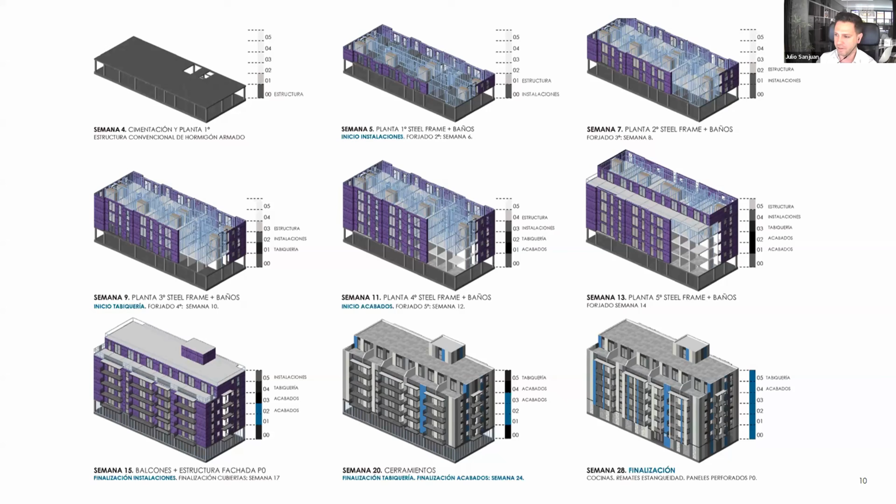But it's not only that precision, it's the fact that you know the layout of every wall. It generates a mindset where from the structure you are, let's say, forced to plan every single detail of the rest of the process. So that's something really good because it makes you get the most out of the design, out of the process planning.